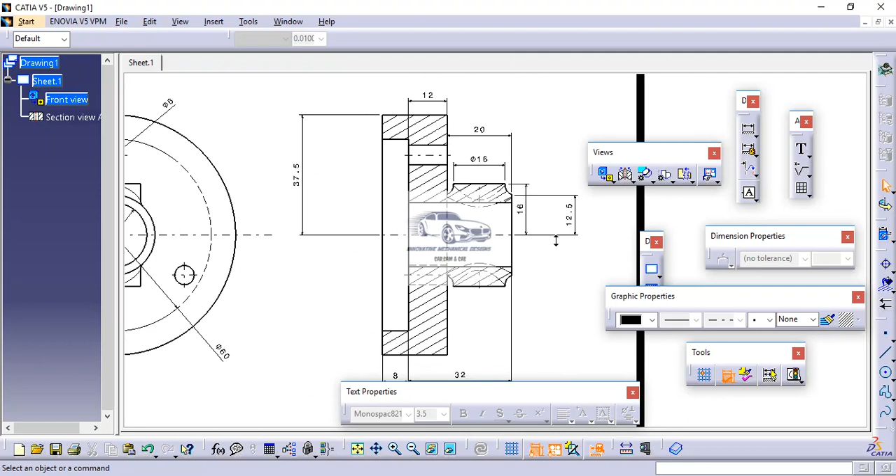So here we have got this dimension. So now this dimension is not getting proper. So here I will off this option half dimension. So now this is 16. Okay. So this dimension we have got 16, and again यहाँ पे रेडियस मेंशन नहीं है फिलेट का, so we will go to dimension, we will select the edge. Now here it is coming in the form of distance, but मुझे ये रेडियस और डायमीटर के फॉर्म में चाहिए। So first मैं यहाँ पर प्लेसमेंट मेथड चेंज करूँगा, प्रोजेक्टेड डायमेंशन like this, and right click and I can select radius tangent.

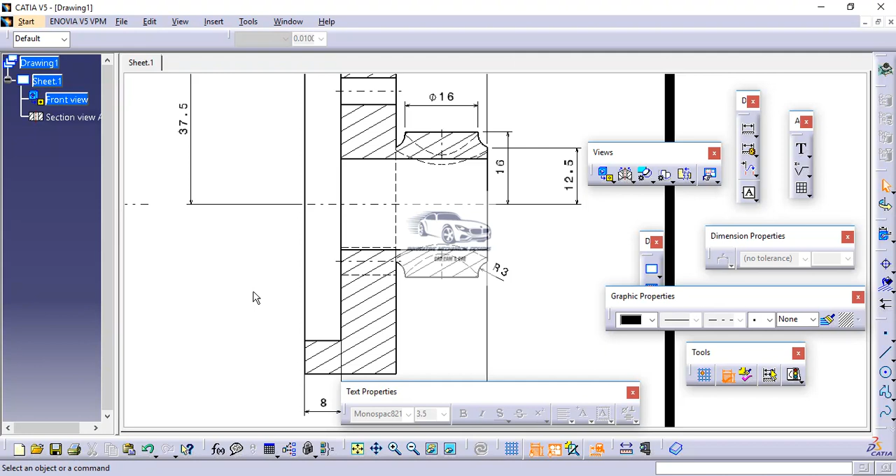So in this manner we can place this dimension like this. Okay, so now we have completed all the principal dimensions. Now how will my printout look like, ये अगर हमें चेक करना है, so in here view toolbar we have an option called as fit all in. So I will click here, fit all in. Now here we can see that जो dimensions का font है वो little bit small है। अगर ये fonts को मुझे बढ़ाना है, what I can do, by pressing control selection you can select all the dimensions जिसको भी हमको modify करना है,

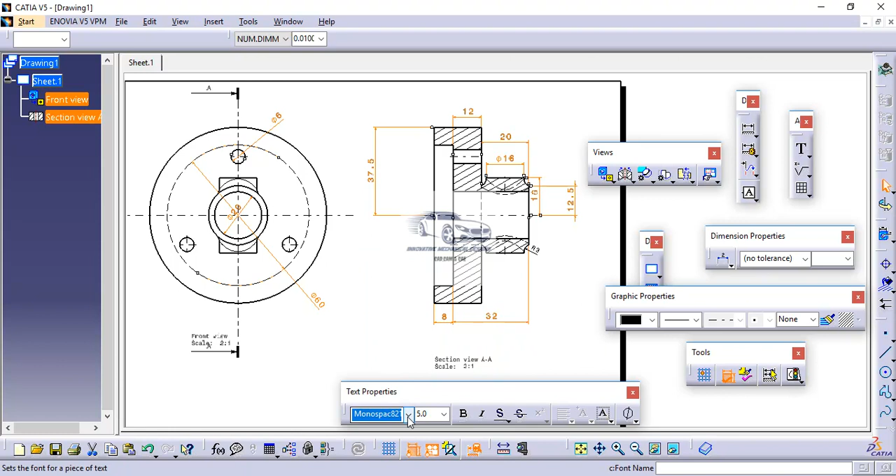and then to edit the font properties we have to go here in text properties toolbar. यहाँ से we can increase the font size. Suppose 5 mm. Suppose you want to change the font from here, so you can change the font also. Now click here. So now we are ready with the dimensions. Again यहाँ पे next input हमें करना है tolerances. Now if we take a look at the drawing, first of all we will input the necessary dimension tolerances mentioned in the drawing. Now before doing it, let us first understand some basics of

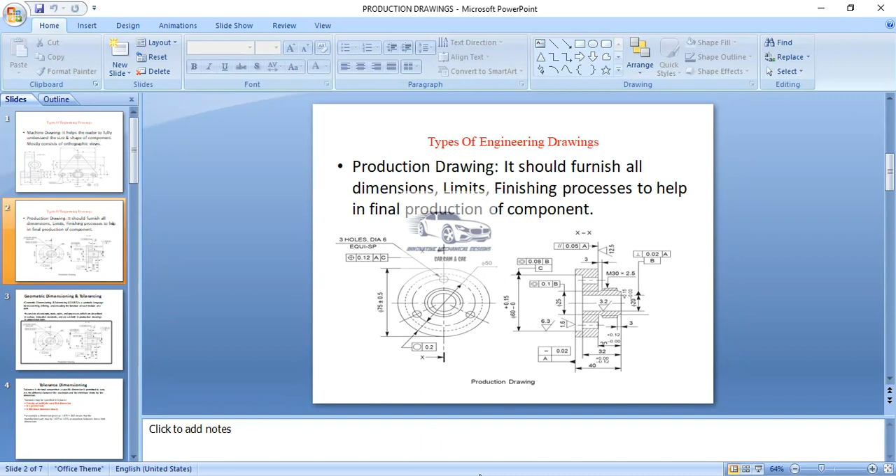tolerances. So in industry, basically we are using the word geometric dimensioning and tolerancing, GD&T. So what is GD&T? GD&T is a symbolic language for researching, refining and encoding the function of each feature of a part. In short, the information provided by GD&T basically helps one to understand कि इस particular part को मैन्युफैक्चर करते समय हमें क्या क्या क्राइटेरियाज, क्या क्या लिमिट्स को कंसीडर करना है.

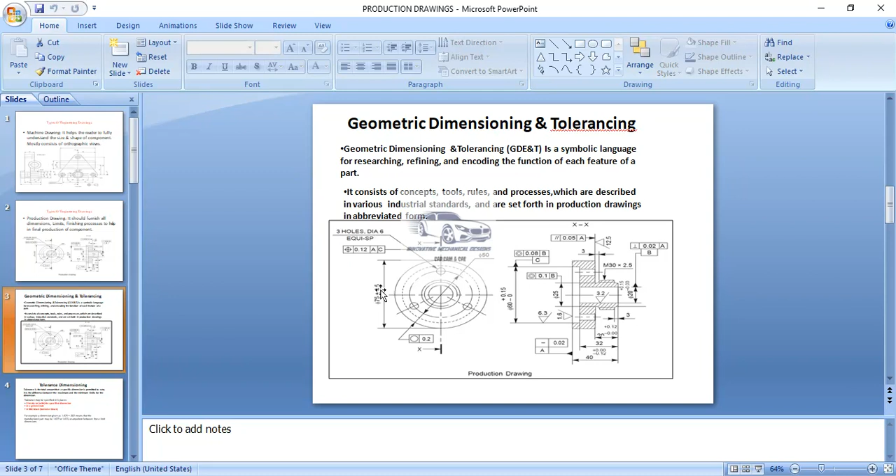99% केसेस में while manufacturing, due to limitation of the manufacturing processes, always एक deviation create होता है. Meaning, for example, this diameter is 75. When it will be manufactured, it will not be maintained 100% as 75, but within an allowable range of plus minus 0.5. So this plus minus 0.5 is called a dimension tolerance. So what is a dimension tolerance? Dimension tolerance is the total amount that a specific dimension is permitted to vary. It is the difference between the maximum and minimum limits for the dimension.

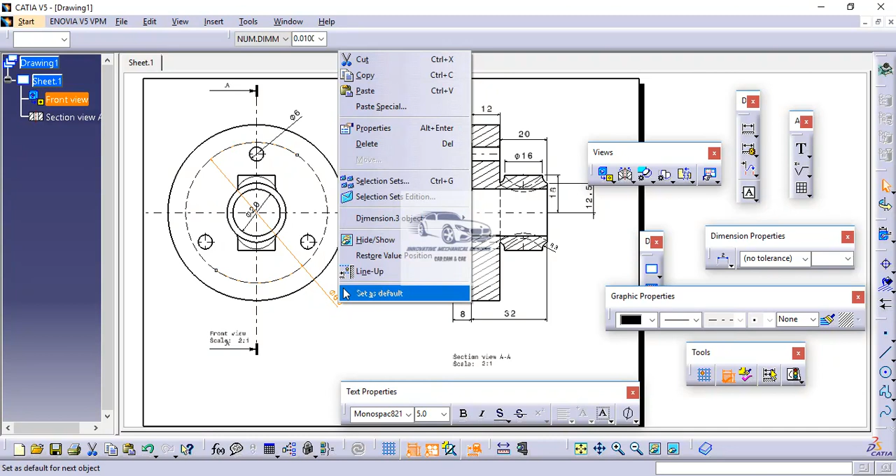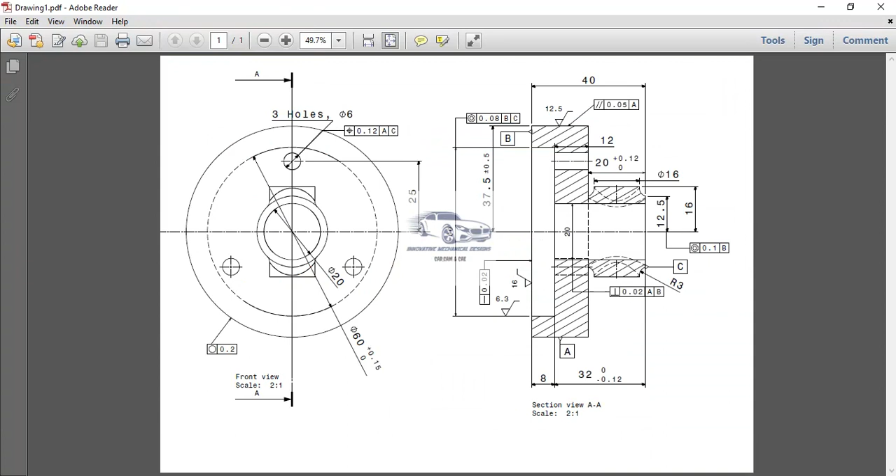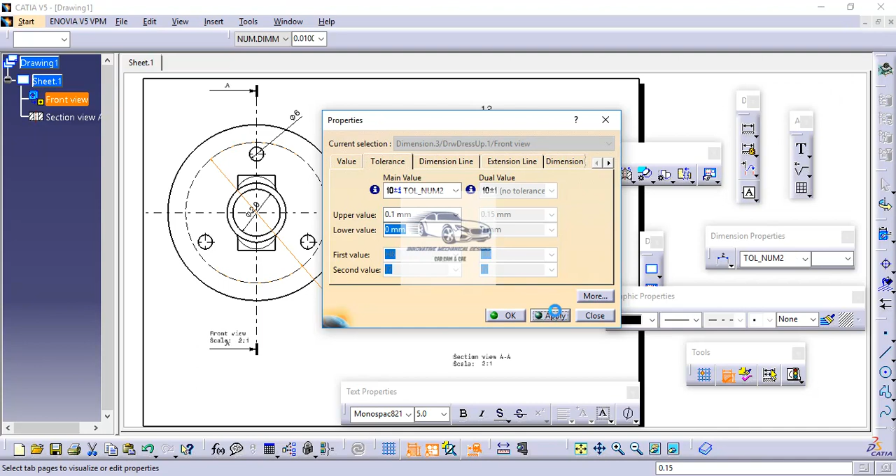So to add it into the drawing, we have to select this dimension, then go to properties, and here we have to go to tolerance tab. Now again यहाँ पर tolerance को मेंशन करने के कई सारे स्टैंडर्ड्स दिए गए हैं, but here we are not being mentioned a specific standard, so we can select this option, second option. Here this option has a meaning that whatever आप upper and lower value मेंशन करेंगे वो यहाँ पर ऑटोमेटिकली बेस डायमेंशन पर ऐड हो जाएगा. So here upper value is mentioned as 0.15. So here I will input 0.15 and lower value I will keep as it is. So apply, then OK. So here we have got the first dimension tolerance. Next